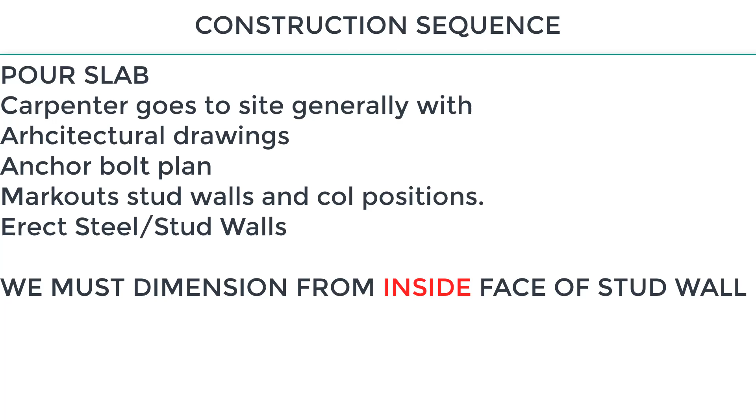Typically what happens with the residences is they pour the slab. That's the very first thing they do. So they pour the slab and then a carpenter goes to the site. He has the plan drawing. Usually that is the architect drawing.

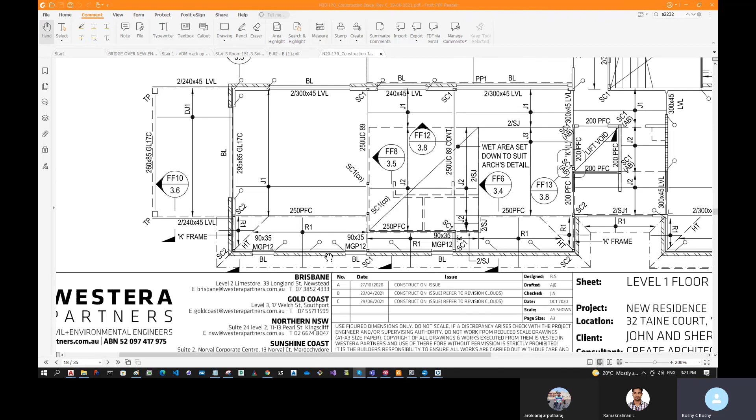So what he does from that drawing is he marks out all these stud walls. That's what he does. He marks everything out here. All the stud walls are marked out. That is where he starts. And then

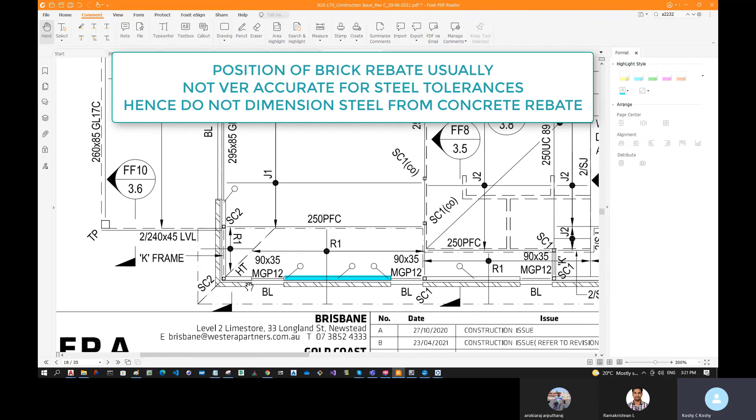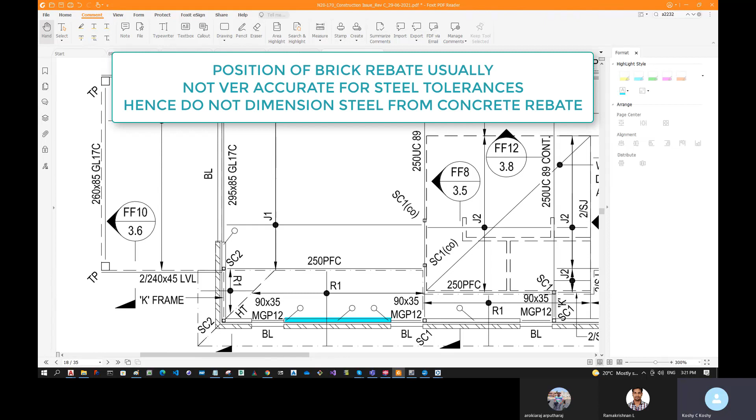all these rebates and all these other things, you have this brick rebate. They are all not very accurate on site. So the slab is never accurate. They always generally pour a bit bigger, but sometimes by mistake they could make it smaller also. That will be a site problem for us.

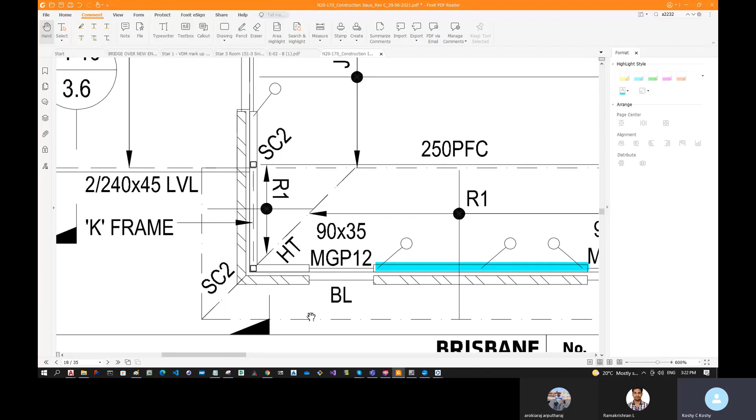But let us say they have poured the slab correct, but see the set down rebate there. Don't expect that to be absolutely correct. It is never correct. So they have a big flat slab and then the rebate is somewhere out there, outside that flat area, to some accuracy, not to the accuracy we want for our steel.

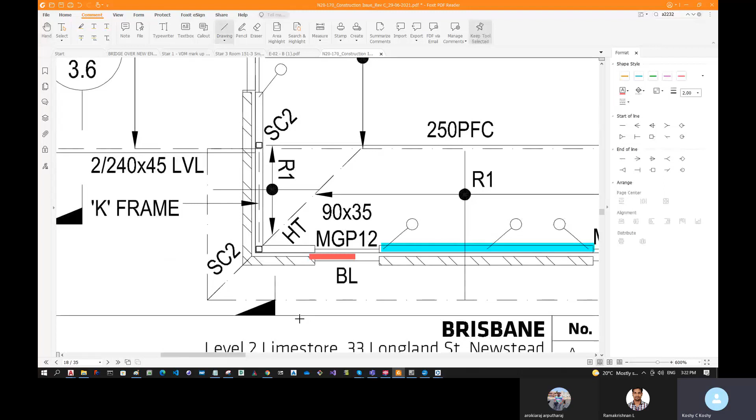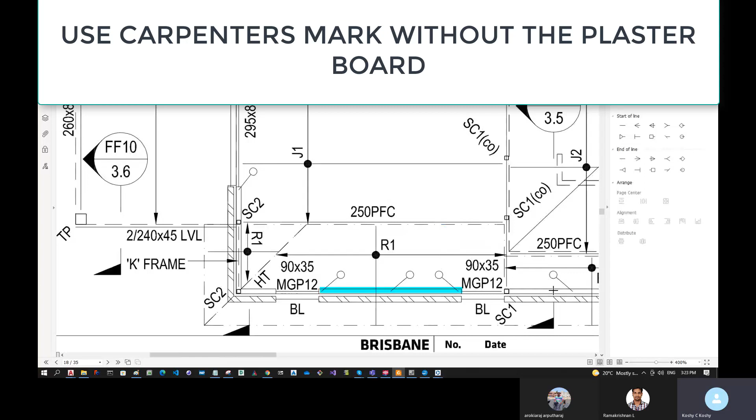So anything you dimension from the big set down line will be incorrect to start with. So what we should use is the carpenter's mark. That is basically the stud wall without the plasterboard. So the carpenter marks out all these stud walls, and then he goes and erects his timber frame. That's the first work he normally does.

Simultaneously, they have our steel drawing marking plan. So they will mark out the column centers. So we need to provide the column centers. That's very important. Okay, it is not enough to give the bolt centers. The column centers should be there because they want to mark out the column centers.

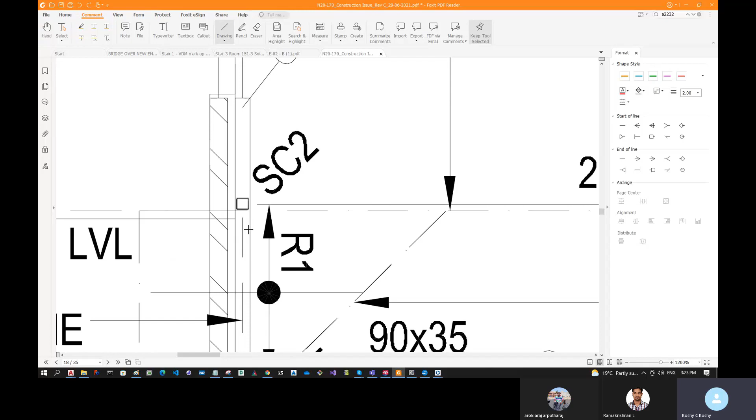Now, once the column centers are there, from the column center we can mark out the bolt center because we need the anchor bolts to be installed. That is how you should mark out. I'll go over that sequence again.

The slab will be poured, then the stud wall will be drawn by a chalk. All the outline of the timber stud wall is drawn by a carpenter who goes to site and draws, and then they will also mark out the column centers to our drawing, and then they start erecting the timber frame. The steel may come sometime in between. Sometimes it can come early, sometimes it may be a little bit late, but that's how the process is.

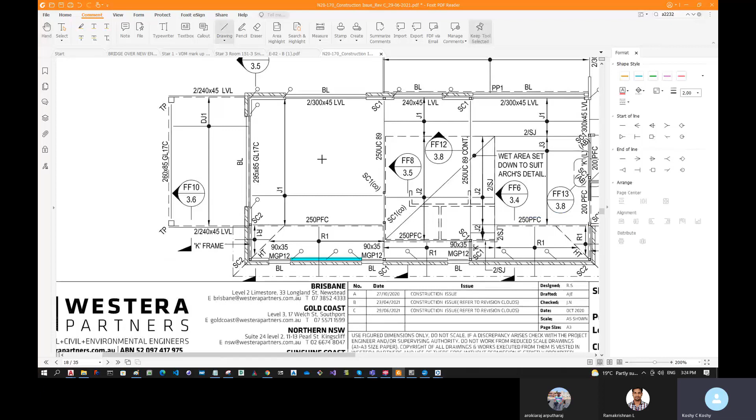Now, let's look at a model. I'm looking at this model, okay? So what we have to identify first is how many framing systems there are. That is one thing which we have to understand. What is a framing system? A framing system is connected steel.

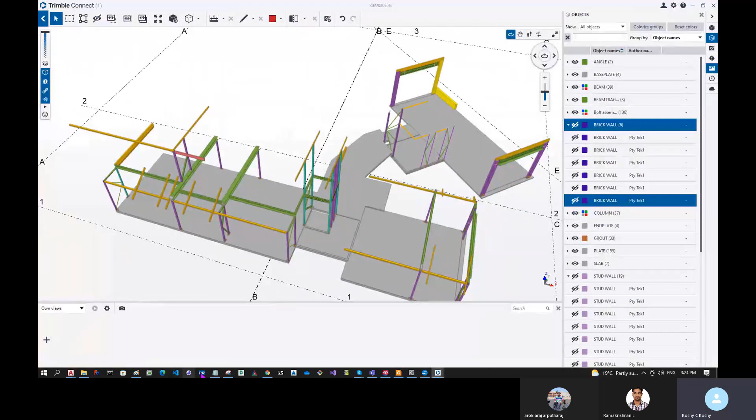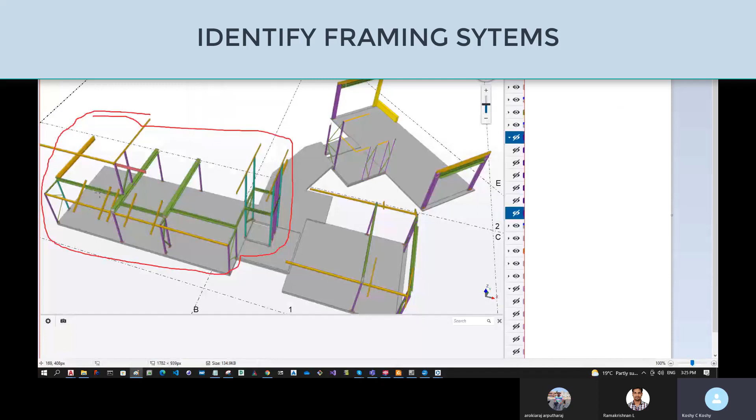So if you look at this one, you can say that is one framing system because all the steel is connected to each other. So if any of the columns is out or any of the beams is out, then things will not fit together. But these frames, actually not even that. This is another one because it's not connected to any other steel.

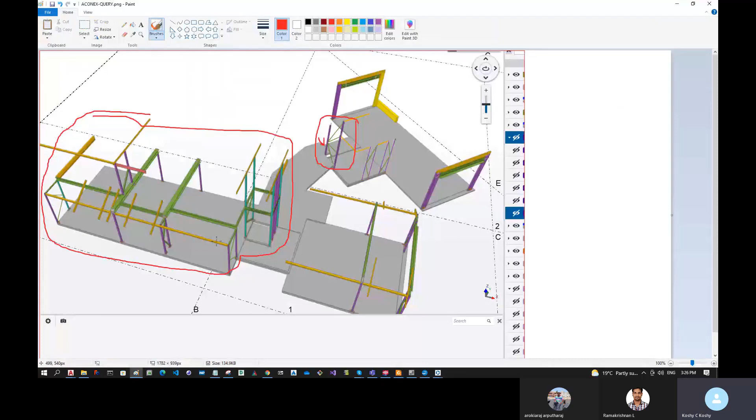So what if it moves a little bit there or here? It doesn't really matter as long as the relationship between them is good. It has no relationship with this one, as far as steel is concerned, okay? And then a third one is this one, and I think this is timber. So this is another system, and there's another system.

So you can see 1, 2, 3, 4, 5, 6 framing systems are in there, but within that framing system, we also need to identify a few things. If you look at this one, because of the drawing, we know that this is a lift.

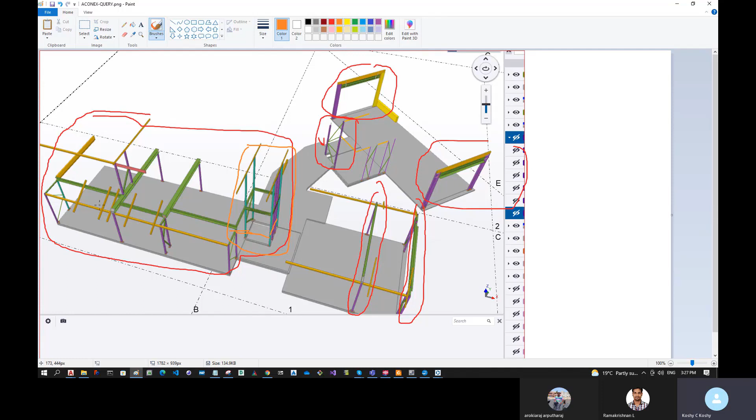Okay, so the lift has to hold some relationship with each other, which is very important because it is to some lift manufacturer specification. So that you have to take care. So when you're dimensioning the GA, you should not connect one framing system with another framing system with dimensions because there is no relationship. These are all marked off stud walls. They can mark it off stud walls, and that's what they should be. That's how your dimensioning should be. And when it comes to the lift, yeah, they are all connected. So you come up to a point, but within that, you should dimension maybe.

Now let's get back to the actual dimensioning of the drawing. So how will I dimension this? So I have to identify the framing systems. So we have identified this one as one system. So first is the timber stud. We have to establish the timber stud from a grid line or wherever, it doesn't matter. A lot of residences have no grid line. May have something, some slab edge or something, or some north mark or whatever, it doesn't matter where you pick it. But you have to sort of establish a dimension for that stud wall. Inside dimension, that is very important, not the outside, inside.

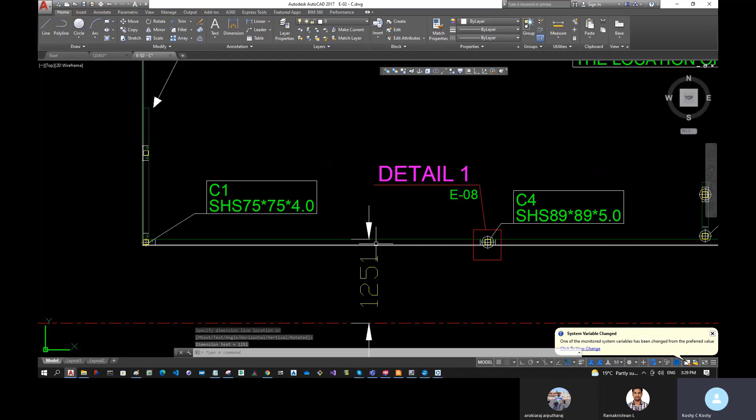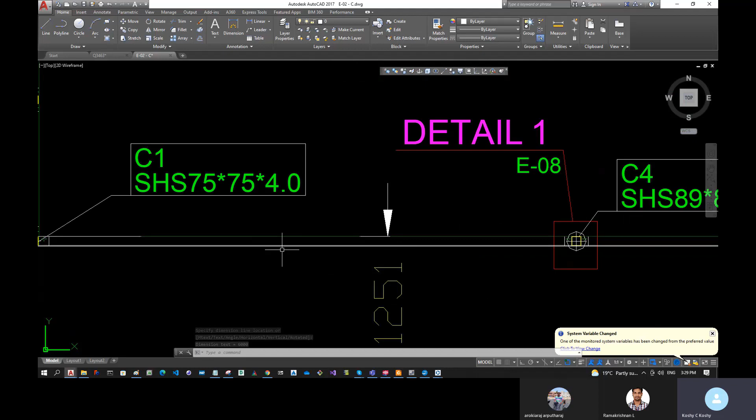This one may be different. On site it may be different, doesn't really matter because we are only trying to establish that dimension, that is one, and then you can say this is basically our datum. The intersection of two stud walls may be our datum, okay? And then you put another dimension to the next stud wall. That basically defines all the four walls for this particular area.

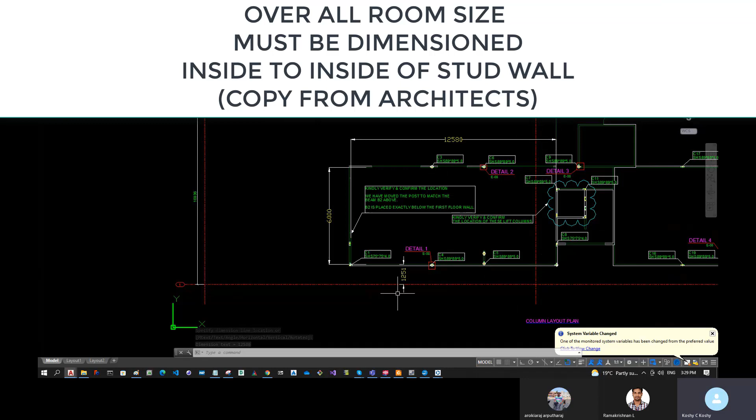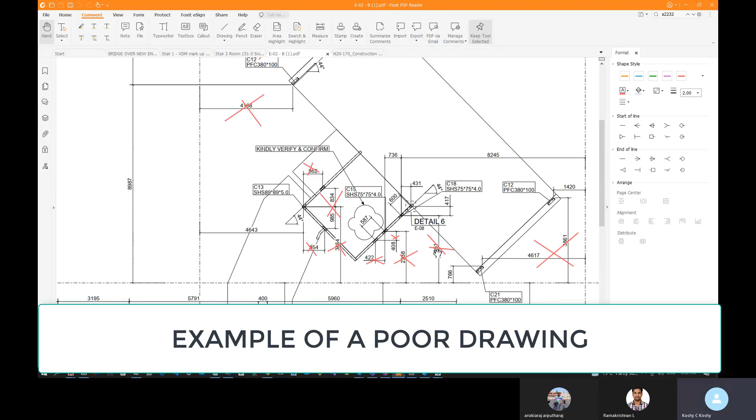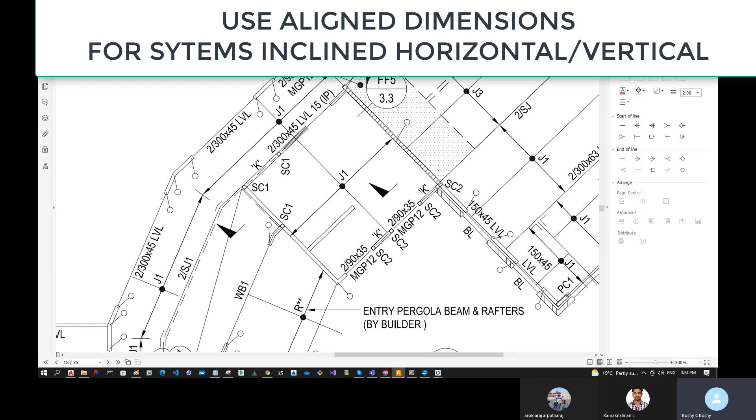You don't want to go to that side of the building because all these columns are relating to this area of the building. So probably you pick up one of these stud lines. The slab will be poured, and this stud wall will be marked. And is there any stud wall here? This is also a stud wall, I think. So this slab also will be poured, and the stud wall will be marked. So what you set, these dimensions and these dimensions. This is where our columns are. So that should be set, and this is the main slab. So this will be somewhere outside. Let's look at the model.

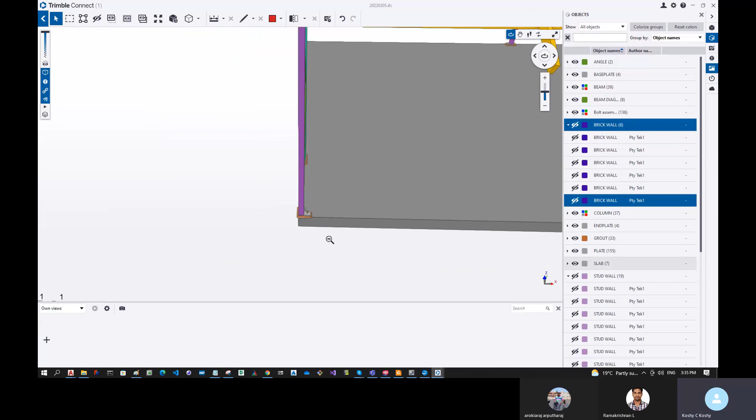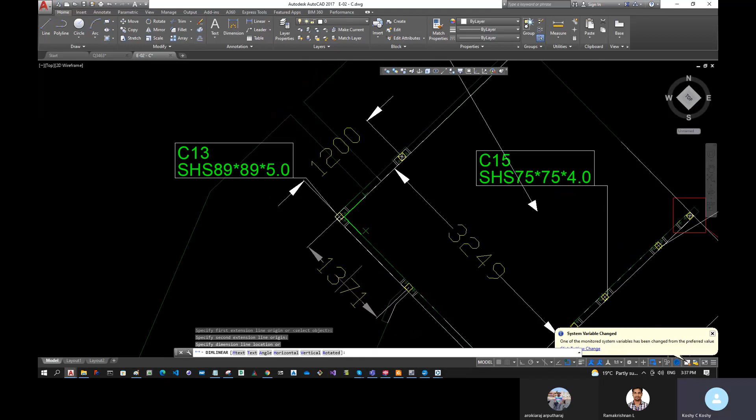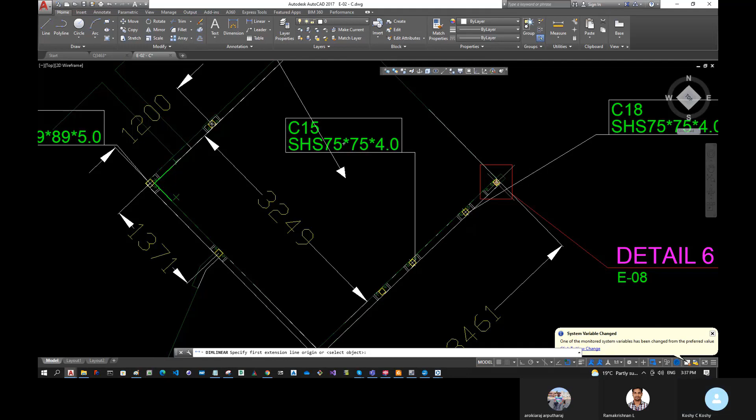These two frames, these two things to set up these columns. So what you do is only dimension that. Don't dimension anything else. That one. That one. The 90 degree. Wherever they will draw the stud wall. Okay. So you are showing only how far from this corner this column is, and how far from here this column is. You have to show the stud walls though. And for these ones, you can't go from this slab edge. Again, they are in the stud walls. Stud walls will be marked, and you only dimension that.

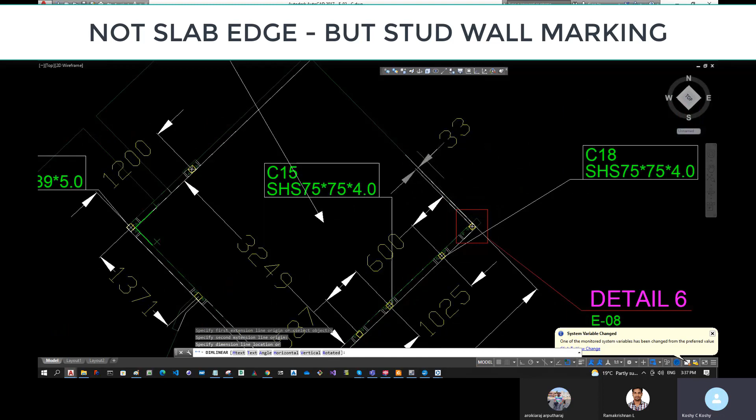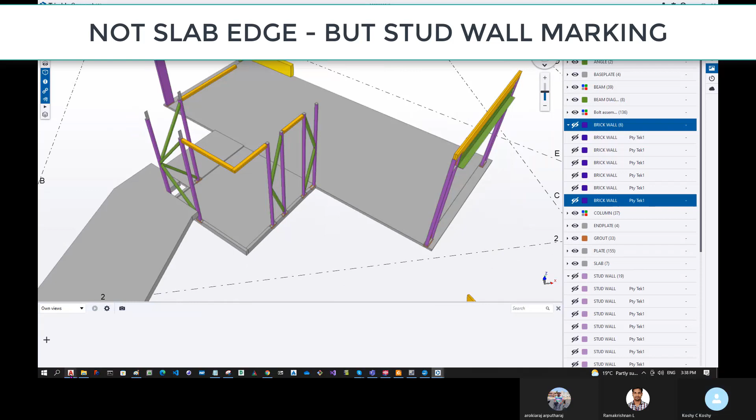And that, of course, this one from the slab edge. So you got to put a dimension from here as well. So that sets these columns. Let's look at the model. So you got a dimension from here to here, from here to here, here to here. That's all you need to dimension. There's no need to dimension anything from this set of columns to this set of columns. And there is no need to dimension anything from this system, this framing system, to this system.

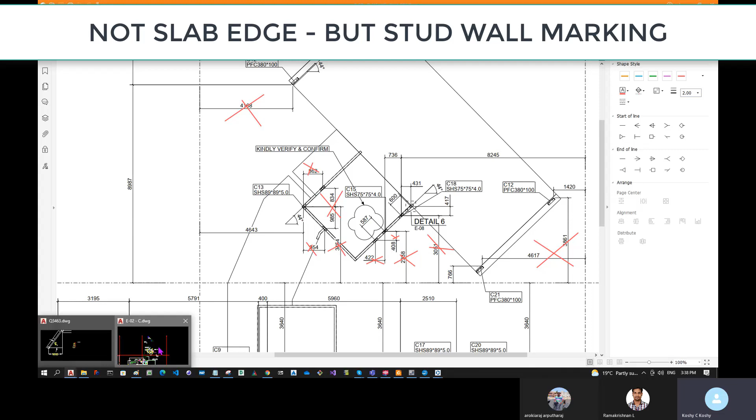And also, just too complicated. See, look, how many dimensions are there? A million dimensions, which cannot be used, number one. It really cannot be used. Complicated and it takes too much time. How many dimensions are here? Hardly anything. This one is actually not required, but I stuck it in so that they can cross check as to whether we did it right. It doesn't matter. All they require is these 3 columns there and these 4 columns there.